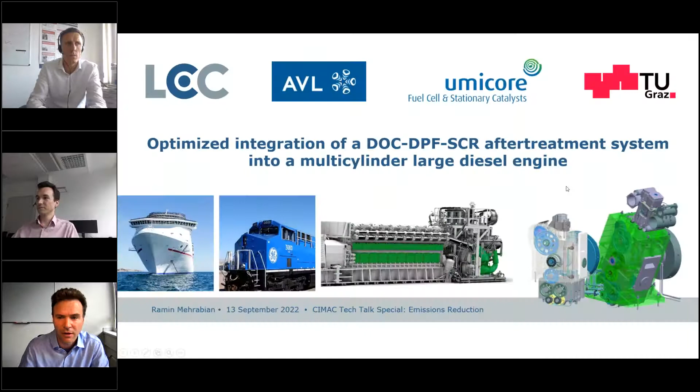Hello, everybody. I hope that you're seeing my presentation. Did I correctly show the slide? Yes, we can see it. Good, thanks.

Hello, everybody, have a nice afternoon. As it was announced, I would like to show some results and also our project together with AVL, Umicore, and TU Graz, which was about the integration of a DOC DPF SCR aftertreatment system into a multi-cylinder large diesel engine.

In my presentation, I will show you some introduction and motivations about this project, the exhaust aftertreatment test system, and also the catalyst specifications which we had, and I will show you some results afterwards, and then at the end the conclusions and summary.

About the motivations in this project: as you know, as a result of continuously stricter emission limits, NOx and particulate emissions of current large diesel engines must be considerably reduced. Therefore, an advanced DOC DPF SCR exhaust aftertreatment system to fulfill ultra-low emissions has been developed and demonstrated in this project.

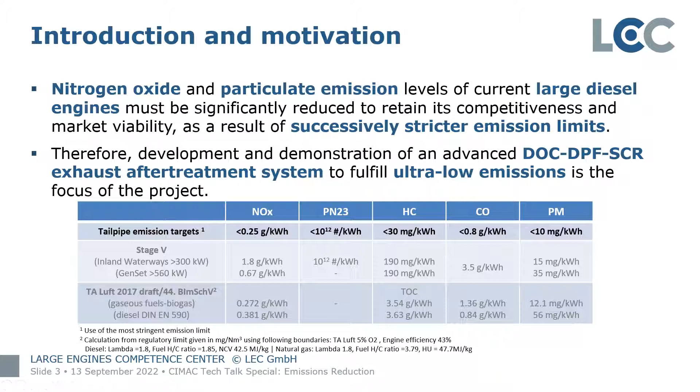Regarding the test cycle used in this project, a non-road steady state test cycle with 8 modes has been chosen for these projects for the evaluation of the exhaust aftertreatment system. It has 4 modes with the rated speed and 3 modes with the intermediate speed of the engine, and of course the idle point, with corresponding weighting factors to calculate the emissions at the tailpipe.

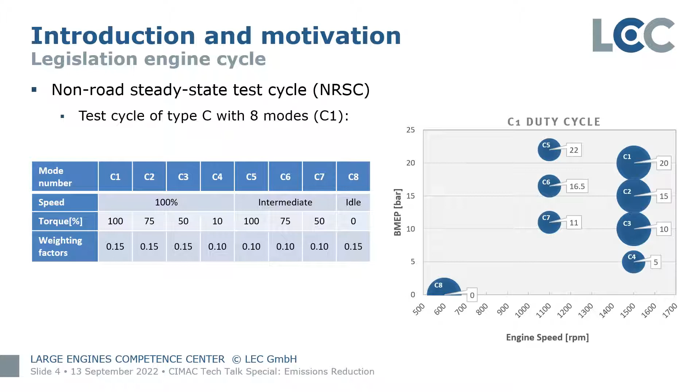This is the arrangement of the test system, and measurement points are schematically shown in this slide. Here, the exhaust gas of one engine cylinder bank is used for the exhaust aftertreatment system because of the size and sizing of the catalyst and also the limitations of space in our test rig. So that means half of the exhaust gas goes through the exhaust aftertreatment system of this engine, and as you can see...

We use, after the turbocharger, a smoke meter and micro soot sensor to measure the particle emissions or soot at the engine out, to more or less monitor these emissions, and then going to the DOC DPF reactor where we measure the temperature as well as pressure and the pressure drop over this unit.

And then the exhaust gas goes to the urea dosing and mixing unit. We also monitor the pressure drop over this part, and then finally going to the SCR reactor, where we measure at different positions the temperature inside the SCR catalyst and also the pressure drop over this unit, and then finally going to the particle counter, doing sampling for the particle counter and smart sampler to measure the particle numbers and particle mass at the tailpipe for evaluation of the performance of the exhaust after treatment system. And of course, at every critical point - inlet of the DOC, outlet of the DOC, outlet of the DPF, upstream DOC and downstream of the SCR - we do sampling to measure the exhaust gas composition with 2 measurement devices: a conventional gas analyzer system and also FTIR, to know the performance of the SCR and also DOC/DPF.

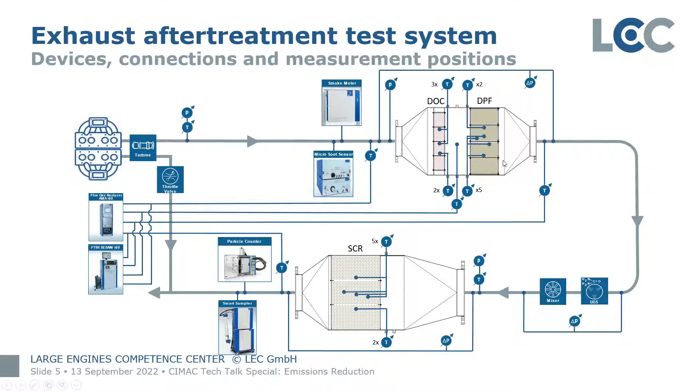And here again a picture about the exhaust after treatment system. The engine, as I said, the exhaust gas of one cylinder bank goes to the DOC DPF reactor.

Here is a picture of our test bed. This is the DOC DPF reactor, and then coming to the dosing and mixing unit. Here is the UDS, and 3 nozzles for dosing the urea, and then this is the mixer, positioned far enough upstream of the SCR, and then going to the SCR reactor and then to the tailpipe. And here, just as an example, here are the measurement sampling positions for the particle counter and also the particle mass measurement smart sampler to measure the particle mass.

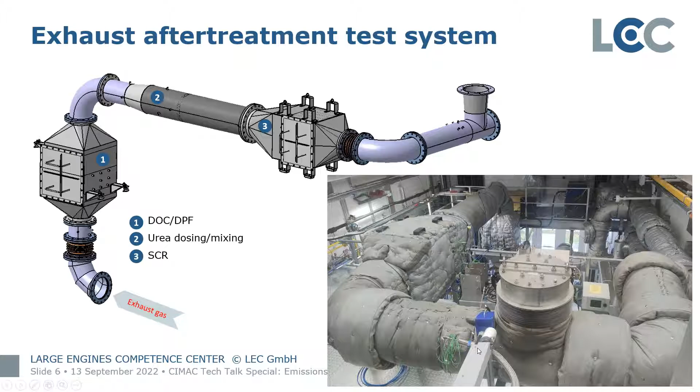Here, briefly, some information about our multi-cylinder engine test rig. The core of this test rig is a 12-cylinder engine with 75-liter total displacement. It can be used to investigate and evaluate different configurations - hybrid propulsion, exhaust after treatment systems - as used in this project, for example. It can also be used to evaluate and analyze different types of fuels, from conventional to hydrogen, methanol, and ammonia.

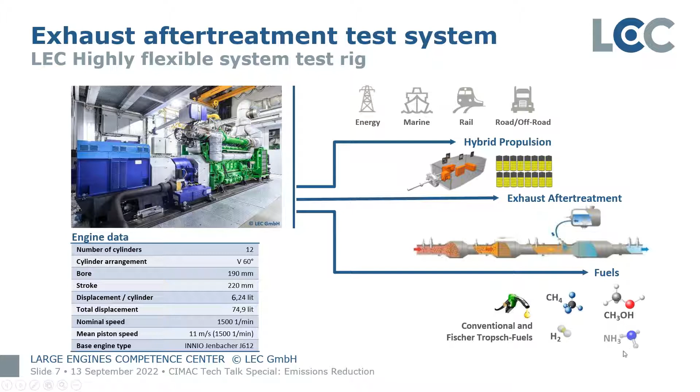In this slide and table, the engine out emissions are shown for each duty cycle point, the discrete mode cycle. Also the total cycle values are shown here for engine out NOx, CO, and HC, as well as PN23. These are measured following the 40 CFR regulation part 1065 to calculate these emission cycle values, the whole cycle value emissions.

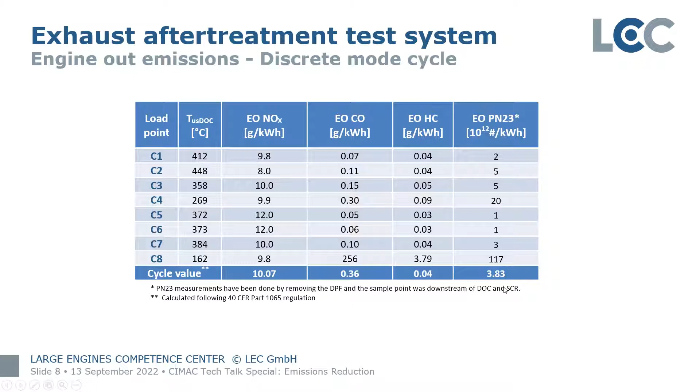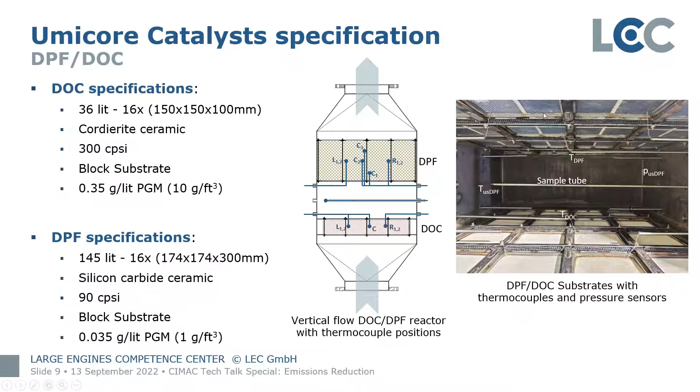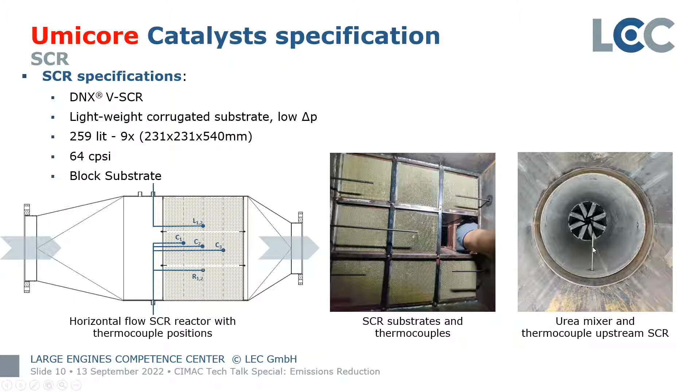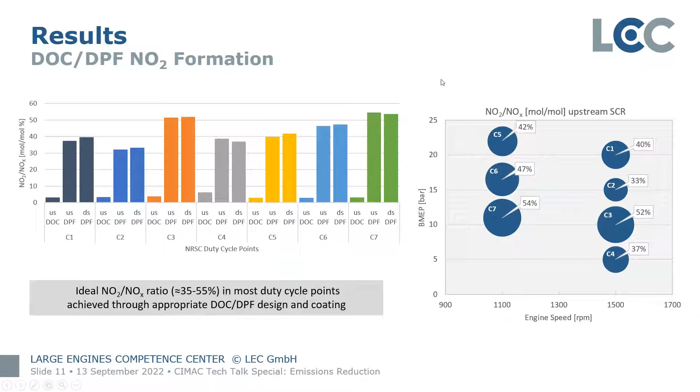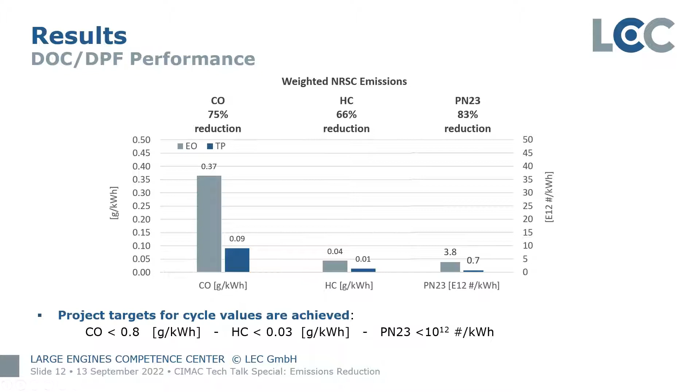The overall performance of DOC DPF was well. We could meet the project targets for CO, HC, and PN23. Here's the PN23 tailpipe emissions, the engine out PN23, and the same for CO, engine out and tailpipe, and engine out tailpipe for HC. If you compare these numbers for the tailpipes with the targets in our project, all of these targets are fulfilled, and these are the reductions of CO, HC, and PN23 due to the good performance of the DOC and DPF.

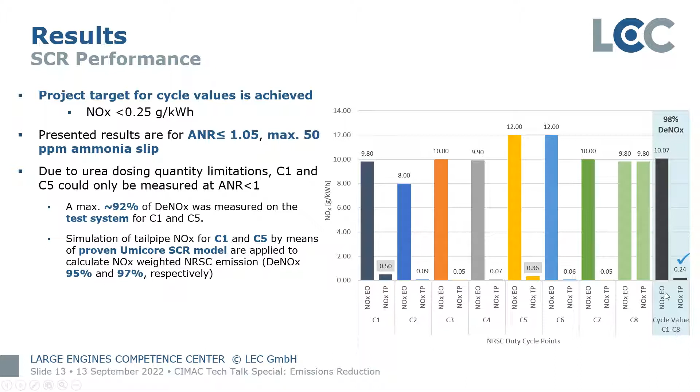Since we wanted to know the performance of these C1 and C5 load points at an ANR higher than 1, which is a meaningful ANR ratio, we used the Umicore SCR model, the simulations of this proven Umicore SCR model, just for these 2 points. Instead of 92% DeNOx, we used the simulated value of 95% and 97% for C1 and C5, and then finally this cycle value for the whole cycle has been calculated.

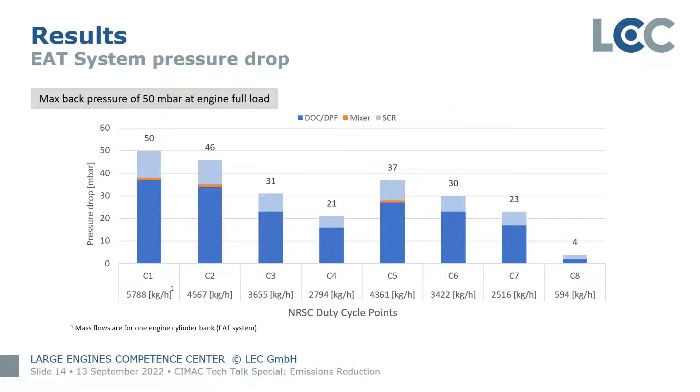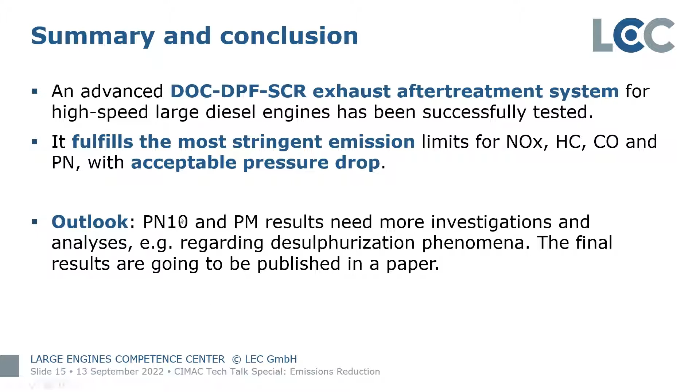Coming to the last slide, to sum it up, an advanced DOC DPF SCR exhaust aftertreatment system for high-speed large diesel engines has been successfully tested in this project. It fulfills the most stringent emissions limits for NOx, HC, CO, and particle numbers with a very acceptable, very good pressure drop. Also, what is still ongoing, we are now further investigating the PN10 and also PM measured parameters because we need further investigations, and this information will be published soon in the form of a paper.

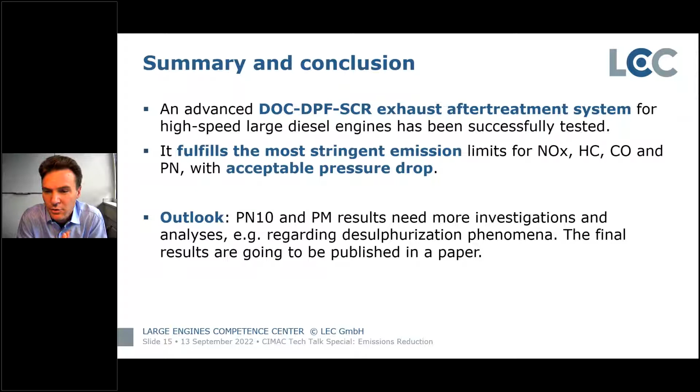The first question was in regard to the substrates. Why do you use a silicon carbide DPF filter and not a cordierite? Could you repeat the question regarding using a silicon carbide DPF filter and not a cordierite? Actually, this was the design to have less pressure drop. As you see, we could achieve this with this system, 50 millibar back pressure.

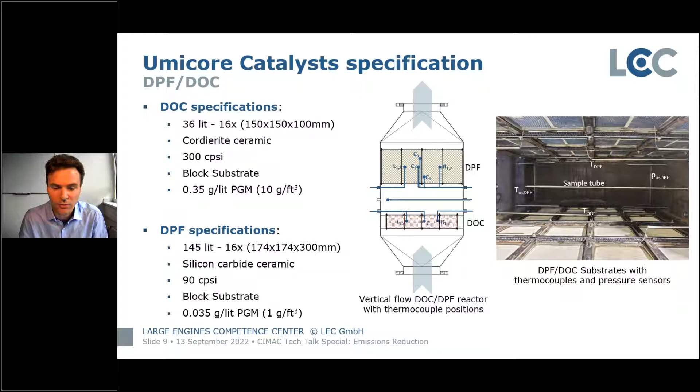Okay, thank you. Then we have other questions regarding the NH3 slip. What was the limit that you set for your NH3 slip? Is 50 ppm of ammonia slip too much, or do you have a certain limit that you set yourself? For the ammonia slip, we set the 50 ppm limit in our measurement and testing system. Of course, not in all of these load points do we reach 50 — we are always something around 20, 25 — but to be on the safe side, we set it at 50 ppm ammonia slip.

Okay, then we have another question. So for a wall flow particle filter, one would typically expect filtration efficiency above 97%. You showed a significantly lower performance. Can you comment on this?

Yeah, we could achieve 83% for PN23. This was actually the performance of this DPF. But I guess this is a compromise between the efficiency and also the pressure drop of this system. I would also like to say it may be referring to the soot cake formations of this DPF, because these measurements were done with very few operation hours, and after longer operation we could have better soot cake formed and better filtration efficiency.

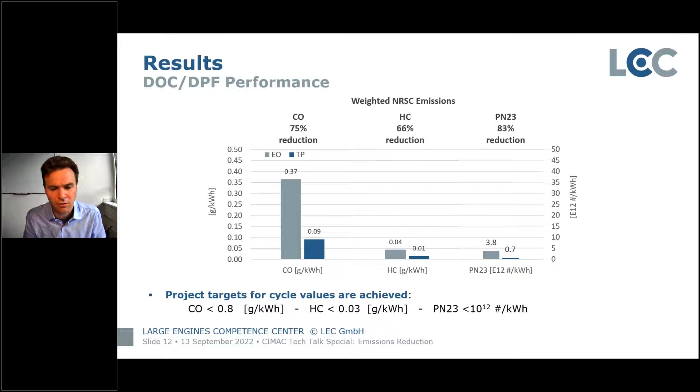No, actually at the beginning of the project we defined, together with UMICORE and also AVL, what the requirements of the engine could be. We should fulfill NOx 10 and PM 15 milligram per kilowatt hour, and this was the minimum requirement for the engine. We did not do any special modifications on the engine.

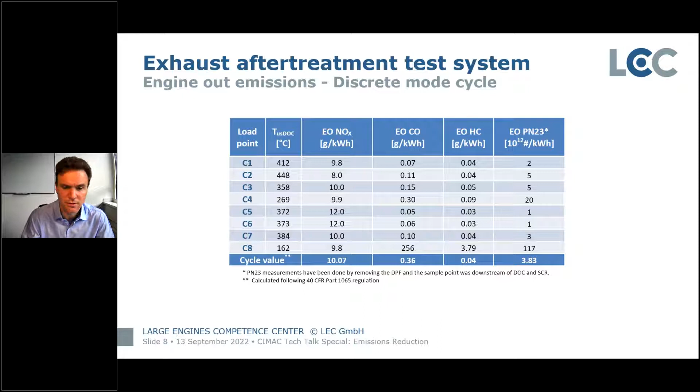He is a research engineer at the Institute of Piston and Combustion Engines, and today he will present something on the topic of investigation on combined scrubbing and particle filtration technologies for maritime application. So, Mr. Etzien, the stage is yours.

Okay, I need to change. Yeah, thank you for the introduction. I just try to share my screen. Okay, now we can see. Perfect. Now you need to see the... where is it? No, you're seeing which one... I think you just switch the two monitors on top. So, Anzeigen, Einstellungen, then you have to switch the primary screen with the second screen. Anzeigen, Einstellungen on top, this one, yes. Now it's the right one, right? Now we see still the PowerPoint. Yeah, so we see the full screen mode. No, we don't see the full screen mode, we see just the PowerPoint. Wow, it's the right screen. You just have to switch to full screen mode. Presentation mode, yes, yeah.

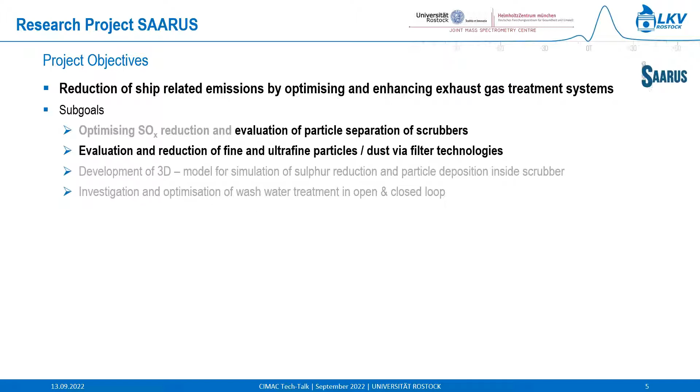If we are looking at the separation or deposition of particles inside the scrubber, there are different factors to consider, for instance the fuel used, as seen in other research work from other institutes. In our project, we used six kinds of fuels: a marine gas oil, and then also an alternative fuel oil.

The alternative fuel was hydrogenated vegetable oil, used just for pre-investigations. For further investigations, we focused on marine gas oil and heavy fuel oils. One of the heavy fuel oils was a compliant heavy fuel oil with a sulfur content equal or less than 0.5 mass%. Then we had a standard heavy fuel oil with a sulfur content of 2.4 mass%.

We also picked two highly aromatic heavy fuel oils, which we called blend A and blend B. Blend A had a low sulfur content, and blend B had a sulfur content of 1.3 mass%.

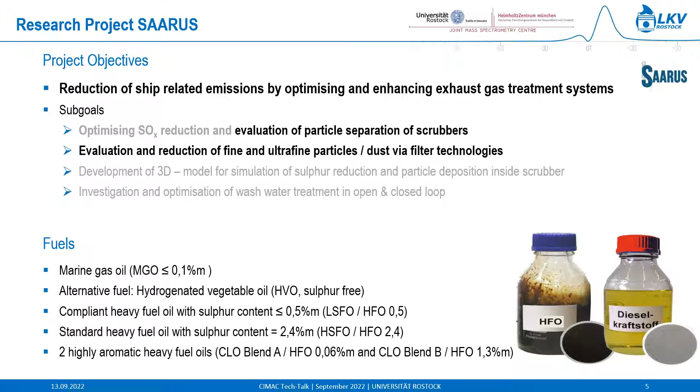Especially for the two blends we were using, which came about due to the fuel change from the sulfur cap of 2020, we can find fuels with high amounts of aromatic components, which can then also be found in the particulate matter emissions. So from the heavy fuel oils, the amount of aromatics is increasing, especially for the blends, where we saw high amounts of aromatic components.

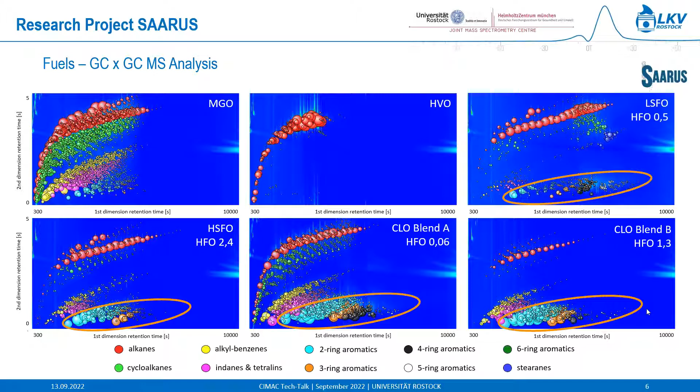Then for the investigations, we used a single cylinder research engine with 18 centimeters of stroke and 15 centimeters of bore.

This single cylinder research and development engine is capable of running on a variety of fuels, from diesel over heavy fuel oils and other blends to alternative fuels. It is equipped with a common rail injection system and has an open engine control unit, and we can adjust the charge air and exhaust gas back pressure at this engine. For our investigation, it was good that we can set up different kinds of exhaust gas treatment systems behind this research engine.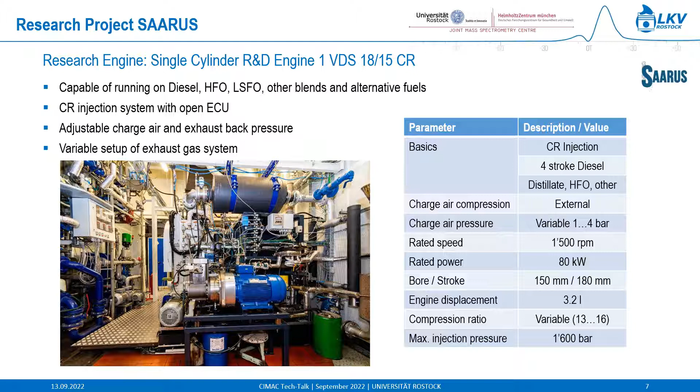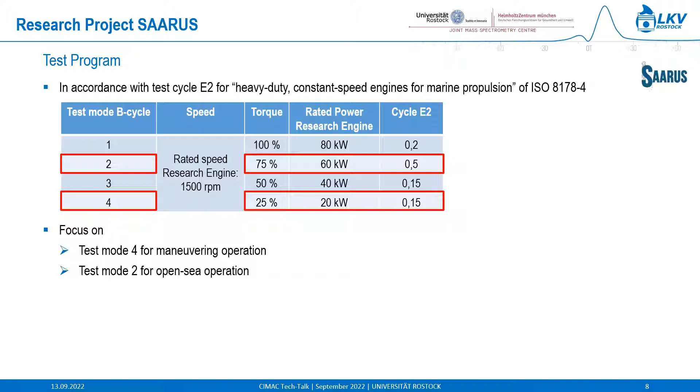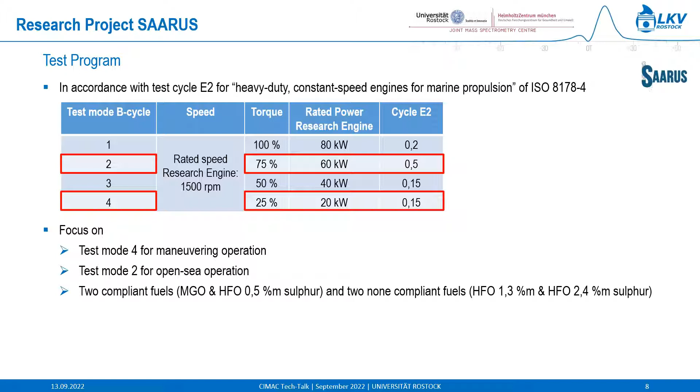From the test program, we were orienting ourselves at the test cycle E2 for heavy-duty constant speed engines for marine propulsion of the ISO 8178/4, and for the main investigations, we were focusing on the two test modes shown here in red. The first is test mode 4 for maneuvering operation at 25% of torque, which for the research engine was a 20 kilowatt engine load point. Then also test mode 2 for open sea operation, which is 75% torque, and here for the research engine it was 60 kilowatt of rated engine power. We also used 4 fuels: 2 compliant fuels, the MGO for the SECA areas, and the heavy fuel oil with 0.5 mass% sulfur for the open sea, and then 2 non-compliant fuel oils. The highly aromatic heavy fuel oil was 1.3% sulfur, and the standard heavy fuel oil was 2.4% sulfur.

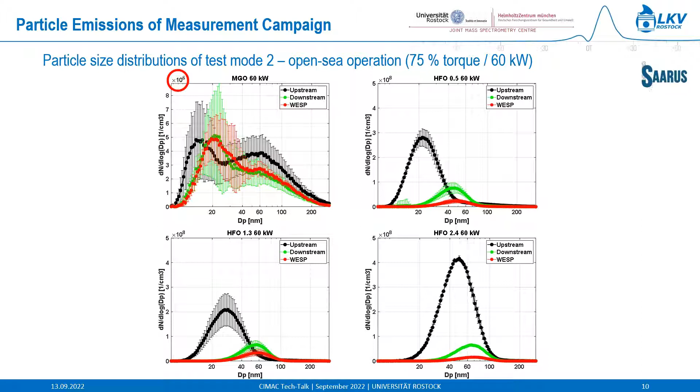Yeah, in the end I will now come to the conclusion. In the diagrams, I hope you've seen that the HFOs show a remarkable higher particle mass and particle numbers compared to the MGO. Then when you look at the black and green curve, the scrubber led to changes in the particle composition. Also, we have seen that sulfur from the gas phase was partially transferring to particulate sulfate, where we've seen some increases in particle mass.

I haven't shown this in particular, but that's additional side information for you. What you've seen in the 4 diagrams on the 2 engine load points is that the scrubber affected the number size distribution of the particle emissions through coagulation of particles. And what we've seen also is that the inhalable particle matter fractions, which are identified as severe public health risks, are not removed. We still have large amounts of inhalable particle matter fractions downstream the scrubber.

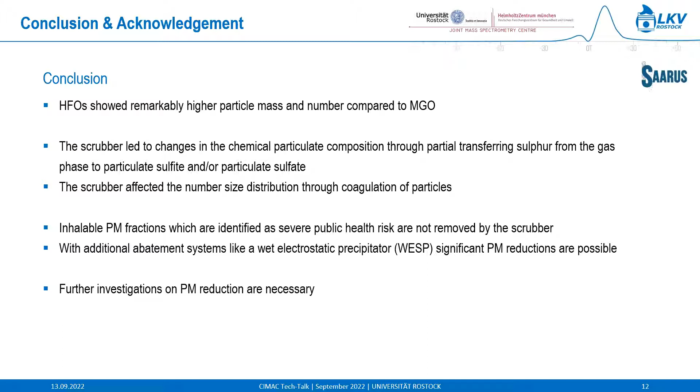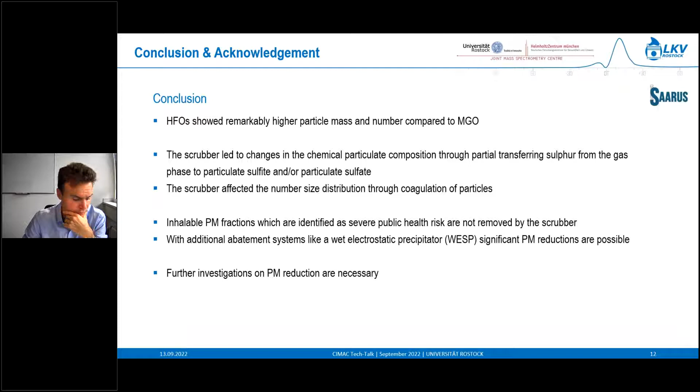And with additional abatement systems like the wet electrostatic precipitator, we can reduce the particle matter emissions significantly. But for the future, there are still further investigations necessary, since the system, the WESP, couldn't be operated at the highest voltage due to the duration of the testing. So for further investigations, the systems have to be optimized to increase the voltage to decrease the particle matter even more.

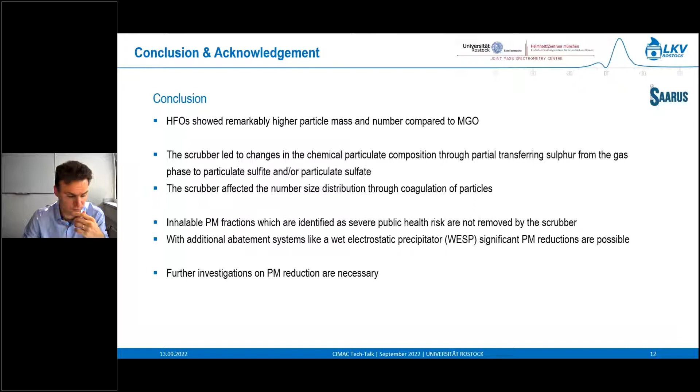Okay, maybe I can. First of all, thanks a lot, Mr. Etzien, for this very interesting presentation. Just a reminder to push your questions into the tool. Maybe I'll start with one from my side: can you say something regarding the dimensioning of this system compared to the cylinder displacement? How much are the individual components compared to the cylinder displacement? I know you're running a single cylinder engine, but just to give a ratio to understand the proportion compared to, for example, a DPF system.

The scrubber was downscaled from the involved company SAACKE, and it's a pretty large tower compared to the engine. It has an inner diameter of 30 centimeters, and it's a U-type scrubber with an entire height of 2 to 3 meters. The filter components, compared to the wet electrostatic precipitator, were 1 meter with the entire cabinet - the electrical cabinet was 1 meter by 1 meter by 2 meters height. So compared to the engine itself, the exhaust gas treatment components, the scrubber, were roughly twice the size, and the WESP was about the same size as the engine itself.

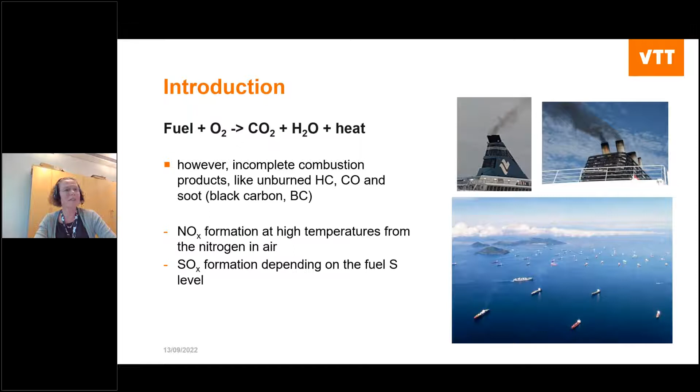So these are the particle emissions. Then, depending for example on the temperature scales, some nitrogen oxide formation happens, as well as, depending on fuel sulfur level, sulfur oxide formation. And obviously the soot, or the black carbon, is visible to us in certain instances, as can be seen from these figures also.

It was already pointed out in the previous presentations that there is a need for actions to reduce particle emissions from ships. This figure from a publication by Hilkka Timonen et al. represents quite nicely the effects that soot, the black carbon, has on both human health and on the climate.

The health effects come mainly from the particle size, since these are small particles that can penetrate deeply into human lungs and cause diseases like asthma and premature deaths. In addition to these effects, soot also affects the climate. There are different kinds of effects - when these particles are in the atmosphere, they can affect direct absorption, take part in cloud formation, and since these particles stay in the atmosphere for days or even weeks, they can also be transported over long distances.

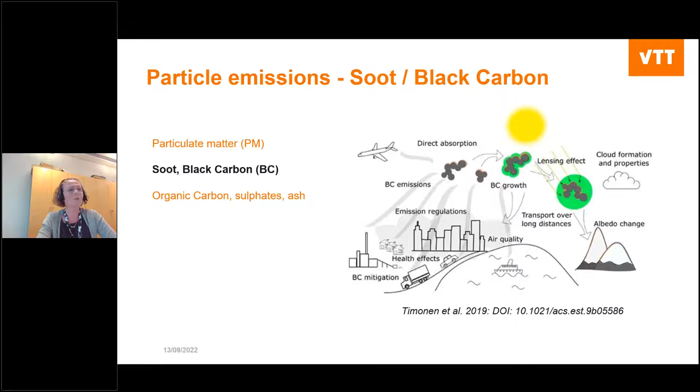One critical issue here is the Arctic areas, where you have white snow, and if you have in addition a layer of black carbon on the snow, you can easily understand the effects it will have on the snow and ice melting processes. So these are important effects it has.

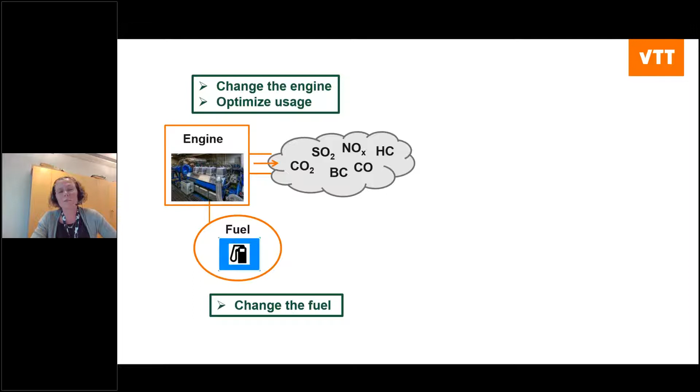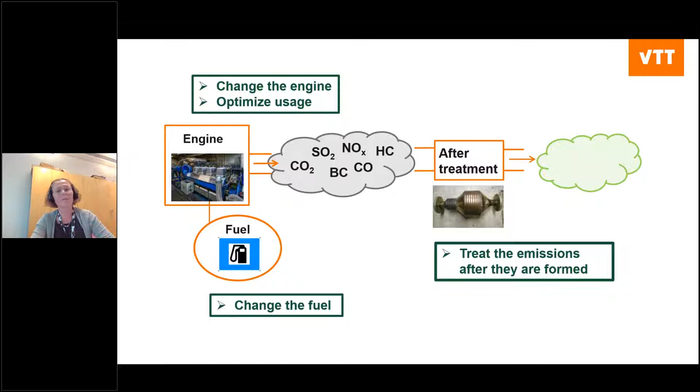Since I like to simplify things, if we want to do something - and we already heard in the previous presentations - we basically only have the engine and the fuel. If we want to change the exhaust gas composition, we need to do something for the engine or something for the fuel. This is as simple as it is, put in a simple way. If this is not possible or enough, then we can introduce an after-treatment device to treat the emissions after they are formed to get those low emission levels.

Today we all know we already have global regulations for nitrogen oxide and sulfur oxide, and this is also where we start, which forms the basis for the conditions when we start to think of reducing particle emissions. It is especially this fuel sulfur level limitation that has a huge impact here. So when one is thinking of particle emission reduction technology, it can only be selected once the choice to fulfill the sulfur legislation is adopted.

Today I will shortly present three different pathways. We actually already had presentations for two of those, and now I will show some more. The first one is when we have chosen distillate fuel to fulfill the sulfur legislation, and we add a diesel particulate filter. The second one is when we choose gas, natural gas, for fuel that is nearly sulfur-free, and relying on the fact that gas combustion is known to produce lower particle emissions, we study that without any after-treatment.

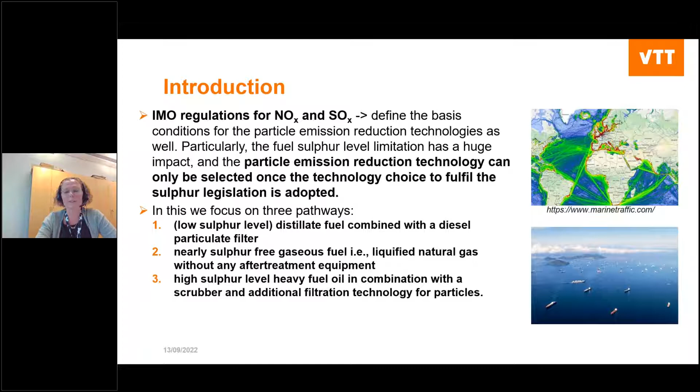With all these three studies, we have conducted particle measurements, also many other gaseous measurements, but I will only concentrate on these particle measurements today - the particle mass measurement according to the ISO 8178 standard method, then the particulate number, also according to this standard that considers non-volatile particles with diameter greater than 23 nanometers in size. In addition to this, we have also measured the black carbon.

Now to these three concepts and results. The first one was the distillate fuel combined with the diesel particulate filter. All of these projects we have run in different engine laboratories. This one was at ABC with a 2 megawatt medium speed engine, and here we had an active regeneration DPF.

We have had these DPFs on the roadside for a long time, and in general those have passive regeneration, meaning there is a catalyst which helps the regeneration. But here we have an active regeneration without any catalyst, and in combination with this, we have an SCR for the NOx, nitrogen oxide, reduction.

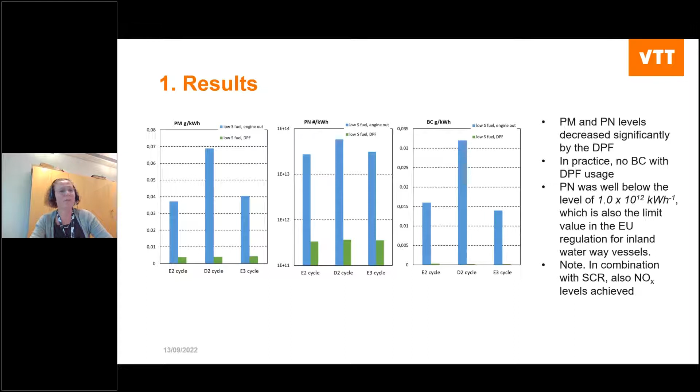When we look at the BC result, we see, or rather do not see, any black carbon here. So the levels were very, very low in practice - we got no black carbon out from the DPF. These results, according to the PM and PN limits regulated in the EU regulation for inland waterway vessels, are fulfilling those regulations. And just to note, I won't show the results, but in combination with the SCR, the NOx levels were also achieved with this concept.

Then to the second project or study. This was done with natural gas as a fuel in VTT's laboratory marine engine, a 4-stroke medium speed diesel engine run in dual fuel mode. We had natural gas as the main fuel, and then this very low sulfur level marine gas oil as the pilot fuel. In comparison, we also did studies with marine diesel oil, which fulfilled the sulfur limitation of 0.1 in this study.

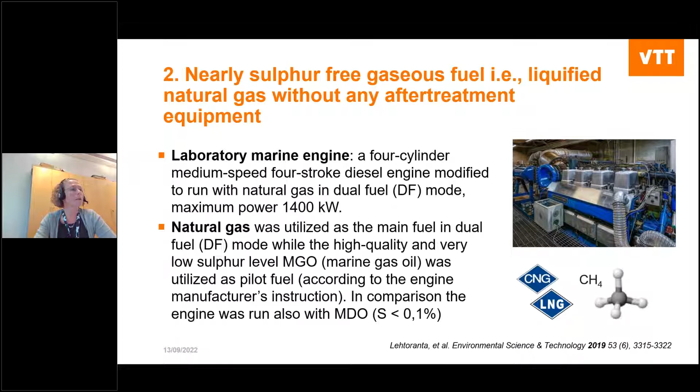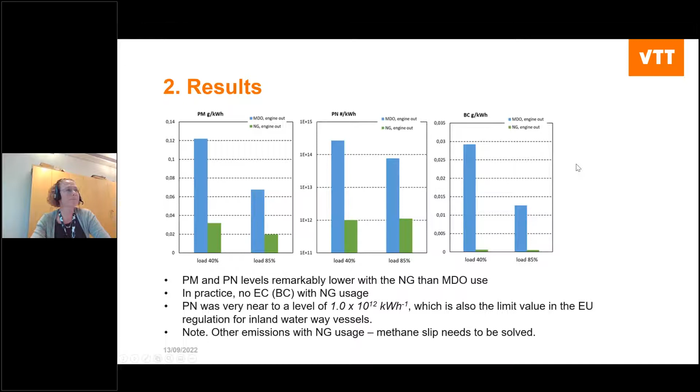Then the third case: high sulfur level heavy fuel oil in combination with a scrubber, and then having an additional filtration technology for particles. Our test fuel here had a sulfur level of 2.75%, and the test setup was built up in connection with a medium speed diesel engine.

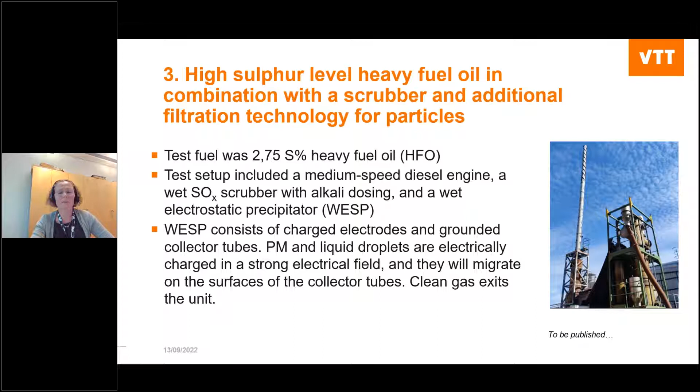We had a wet scrubber with alkali dosing, and then a wet electrostatic precipitator. The electrostatic precipitator consists of charged electrodes and collector tubes - the particles are electrically charged, and then they are collected on the surfaces of those collector tubes. I won't go into details of this, as this is something to be published later on.

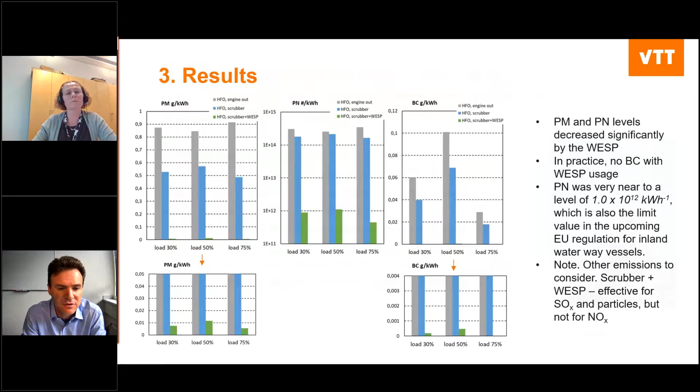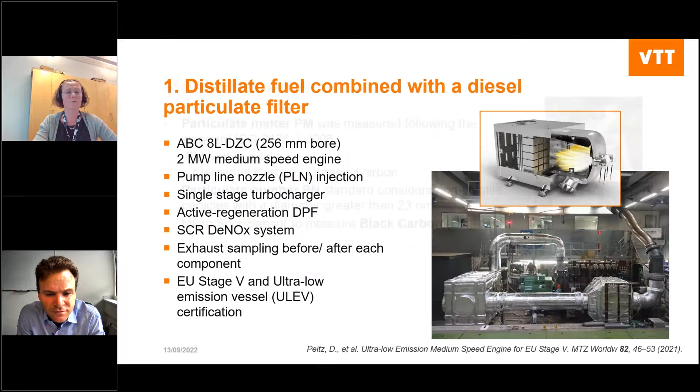Okay, then I have a question from the audience regarding the measurement methods used in the study. They say that IMO's black carbon measurement methods are discussed, so can you mention which methods were used in this study for the black carbon measurement? Yeah, for the black carbon measurement we had the microsoot sensor. As far as I know, this fulfills the IMO's black carbon definition.

Other questions from the audience? Otherwise I will do my last question. Do you see the possibility that particulate matter will be introduced in the upcoming IMO legislation? What is your opinion in this respect? Like it is now in Stage 5 for highway, do you think the upcoming IMO legislation will also introduce this, or will it just be an additional requirement for specific vessel type approval? Since the black carbon issue has been in discussion for so long, I would expect to have some limit, especially for black carbon.

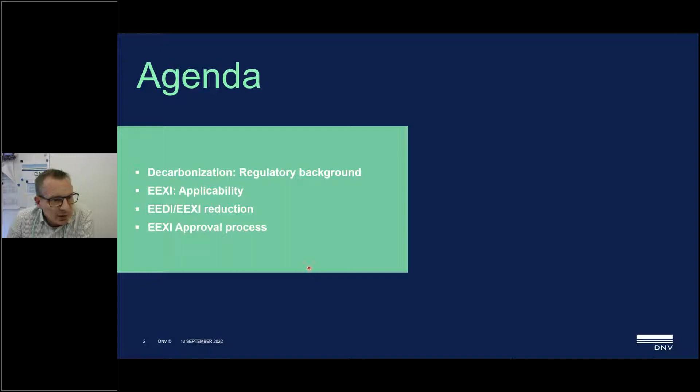Thank you, Stefano, for the kind introduction. I hope you can all see my presentation now. Okay, thank you. In my session, which will close this tech talk for today, I will talk about decarbonization and reduction of greenhouse gases. First, I would like to give a short introduction into the regulatory background at IMO, and then for the rest of my presentation we'll focus on the so-called EEXI, the Energy Efficiency Existing Ship Index.

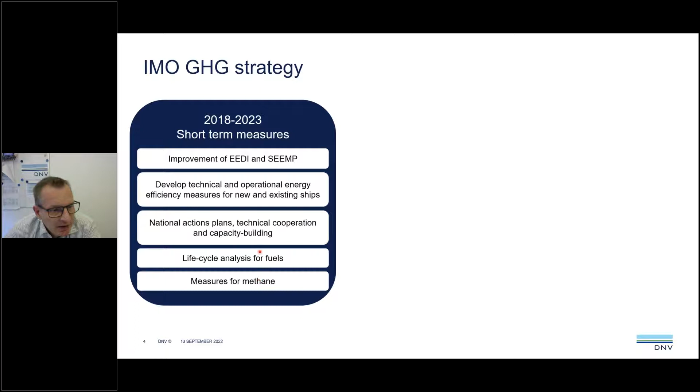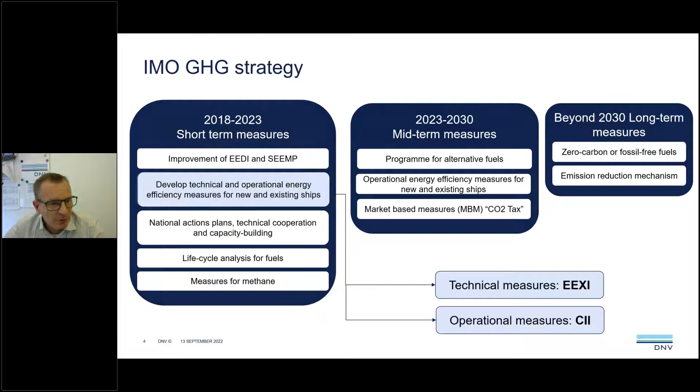Only shortly, at the end of this long day, into regulations. I would like to start with some regulatory background, though I won't go too much into detail, but I believe it's worth showing that these short-term measures by IMO, the EEXI and CII, are only the beginning of a longer story on greenhouse gas reduction imposed by IMO, which most of us will be faced with for the next couple of years, maybe even up to our retirement. The short-term measures are illustrated here, one of which is development of technical and operational energy efficiency measures for new and existing ships, and also life cycle analysis of fuels. On top of that there are mid-term and long-term measures. In my presentation I will focus on the development of technical and operational energy efficiency measures for new and existing ships, which are now regulated as the EEXI, a technical measure, and CII, an operational measure. First, let's look into the EEXI, the Energy Efficiency Existing Ship Index.

That is nothing else than an extension of the well-known EEDI, the Energy Efficiency Design Index of ship. In short, it is nothing else than a specific CO2 emissions of a ship. So it is the engine power multiplied by fuel consumption, specific fuel consumption, and then defined CO2 factor for the respective fuel. Then innovative technologies which reduce CO2 emissions can be deducted. And that is then basically divided by reference speed capacity, which is in most cases the dead weight,

and several correction factors depending on ship types and so on. Now, the important thing is that the EEDI and also the EEXI, which is now also applied for fleet in service ships, is only calculated once in a lifetime. So there is only a one-off thing to do if no bigger major conversions are done to the ship or the energy efficiency of the ship is significantly improved.

And like NOx emissions, the EEXI is based on standard reference conditions. So it's kind of like you can compare it somehow to the automotive industry, where also the fuel consumption, you might know about the NEFZ test, is measured under reference conditions. So similar here now applies also for the EEXI.

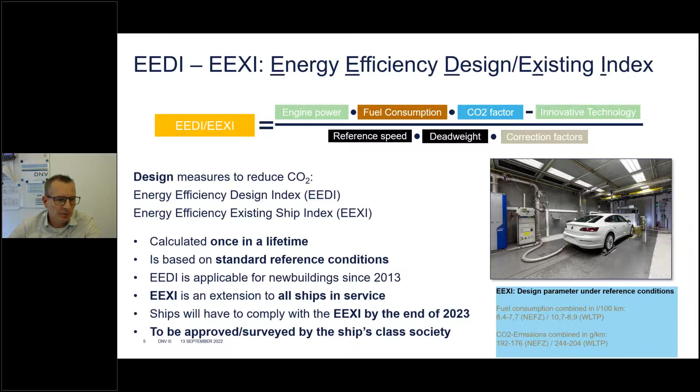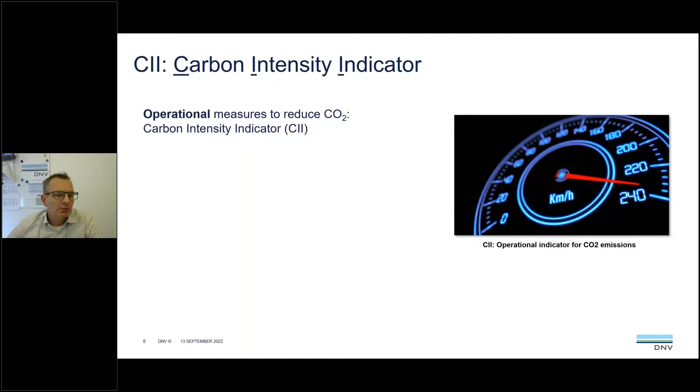Only one slide maybe on CII, only to illustrate the differences here. The CII is an operational measure. So, if you again compare it to the automotive industry, that is not the NEFZ fuel consumption, that is actually the in-use fuel consumption, how you operate your vessel or your car, okay? And that is purely based on reporting of fuel oil consumption data, which is done on an annual basis anyway.

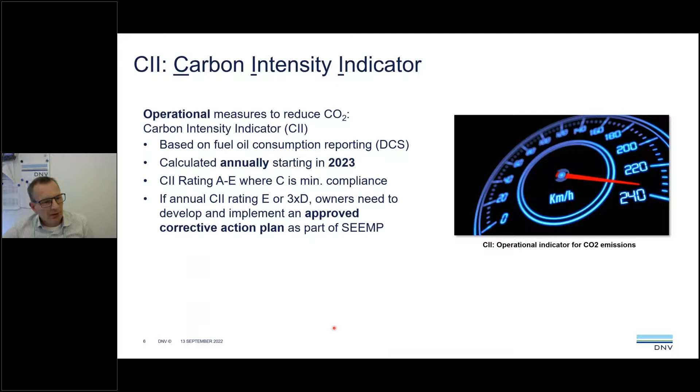And then based on this fuel oil consumption data being reported by the owners and the distance traveled, the CII is calculated on an annual basis, and there will be a rating. And depending on the ratings, ships have to react and implement mitigating actions in case they do not comply with the required ratings over the years.

So back to the EEXI. So again, this is a design measure only to be calculated once in a lifetime and certified under reference conditions. If you take a closer look into the formula again, then you can see here what the biggest influencing factors are. So that is on one side here, of course, machinery, engine power, fuel consumption.

Fuel consumption, I believe, the potential to further reduce fuel consumption is marginal. However, here the CO2 factor, so that is the fuel actually used under design conditions, again, has a big impact on the EEXI value. And then on the other side, also, of course, the reference speed. So that is more or less the hydrodynamics.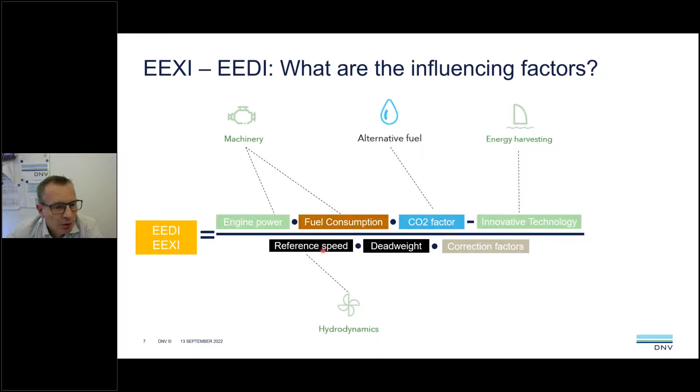We also see that for certain ship types, the EEXI is not applicable. It is worth to note, however, that the CII rating has different applicabilities. So if your ship does not require to report an EEXI, it does not automatically mean that it does not have to report a CII rating. So please take a closer look at here the applicability charts.

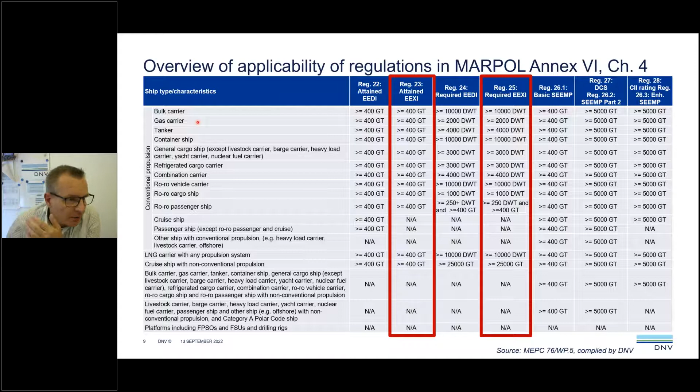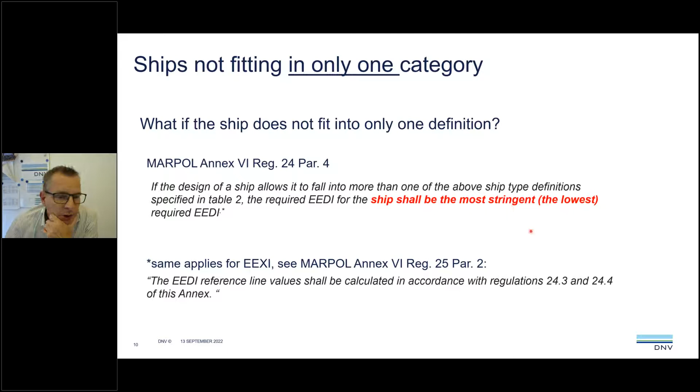One question we are commonly faced with is actually if a ship does not fit into one category. So if, for instance, a ship can, according to the definition, be categorized as bulk carrier or general cargo ship, then also the regulation is clear. Ship must be under this EEXI regulation, must be categorized under the most stringent, meaning the lowest required EEDI and the lowest EEXI.

A few minutes ago, I mentioned that the EEXI is an extension of the EEDI for the fleet in service ships. So now you might ask yourself, does it also apply to new buildings? Here's a clear answer: yes. Ships will have to comply with the required EEXI values on the first periodical survey in 2023, but also on the first initial survey, which is the delivery.

Now you might ask yourself, okay, but vessels also have to comply with the EEDI. Why am I mentioning this? Well, the reduction requirements for EEDI and EEXI are not aligned. The EEXI is actually more stringent than the EEDI.

So depending on the contract date and delivery date, a vessel like this bulk carrier might fall under the EEDI requirements for phase 1 only. However, if the vessel is delivered, say in March next year, it will have to comply at the time of delivery with the required EEXI also, which is more stringent than the required EEDI. So please keep in mind that EEXI is more stringent in most cases than the EEDI, and will also have to be complied with by ships under construction now.

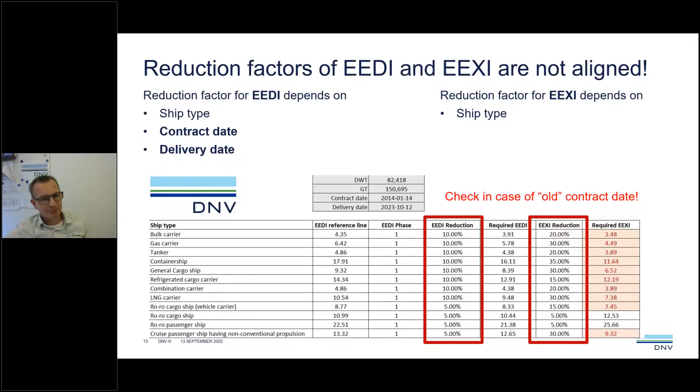Okay, what are the countermeasures? How can the EEXI values, mostly for the fleet in service ships, be improved?

I tried to illustrate already with the formula, shown shortly by these blocks. But this only gives you some ideas about the potentials.

The biggest potential, and what we see most applied so far, is engine power limitation. For instance, just as an idea: if the engine power limitation is reduced by up to 50%, that will result in an EEXI improvement in the order of 37%.

A big improvement also comes from a fuel switch to alternative or fossil-free fuels. Fossil-free fuel, like ammonia, will even have an EEXI of 0.

However, ammonia engines are not yet available, so some ship owners already constructed ships with LNG as fuel. Here you also see that not only a specific fuel consumption improvement is achieved, but also due to the difference in the fuel conversion factor to CO2, an EEXI improvement in the order of 25% can be achieved.

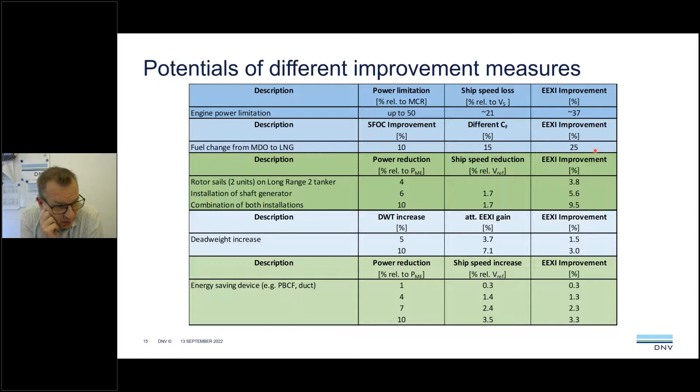However, conversion of a diesel ship to a dual fuel ship is quite costly and might take more time. So we have seen a couple of conversions, but what we see most for the time being, in order to comply with the EEXI, is actually engine power limitation.

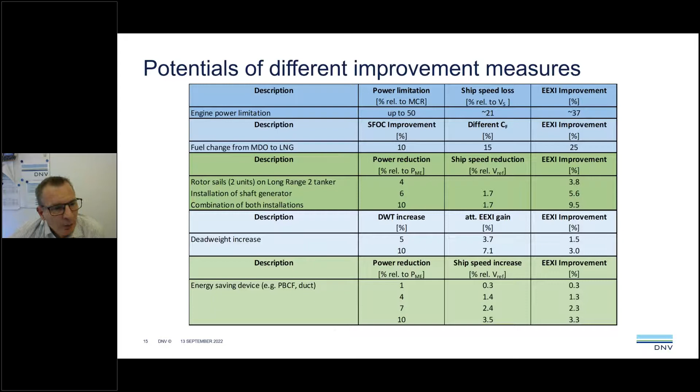All the other measures you see here, like rotor sails or energy saving devices such as ducts or other measures, are marginal. IMO, however, also allows for other innovative technologies, though they are still at an early stage. Some ships already apply those, like photovoltaic cells or wind assistance by Flettner rotors, but those are only marginal in actual construction now.

But I believe we have to see more of those in the future in order to comply not only with the EEXI requirements, but all these measures will also have a direct effect on the CII, of course.

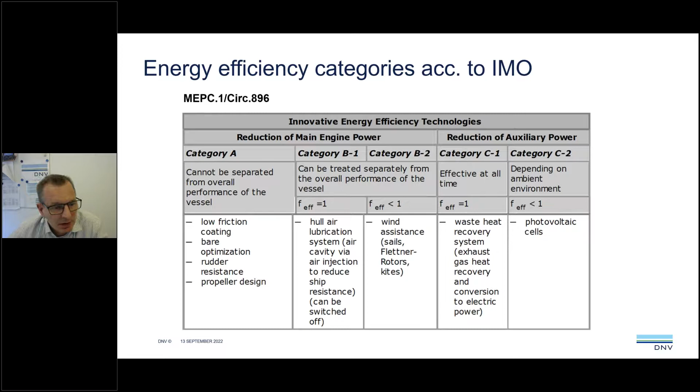Coming to the most effective, or most prominent, measure now applied for EEXI compliance: the so-called engine power limitation or shaft power limitation. Engine power limitation is a limitation of the power of the engine itself, whereas shaft power limitation is based on measuring the torque.

The torque is measured on the propeller shaft, and then in a closed loop the engine power is limited based on that torque measurement.

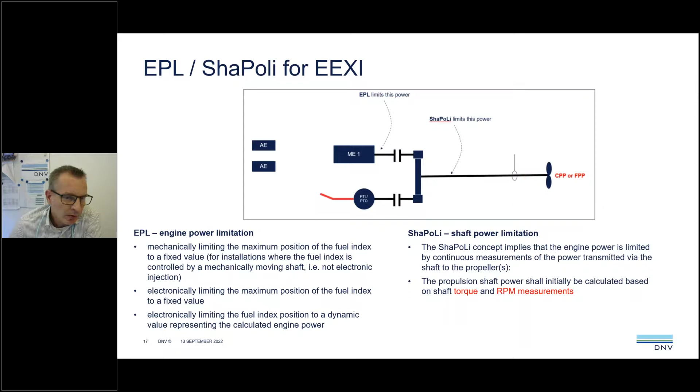You can identify different functions now for these EPL and ShaPoLi systems, and DNV now also offers a type approval for these systems. You might have seen at SMM last week we presented 2 type approvals which fulfill part of these functions, or maybe even all of them.

There's power limitation, and an override must be available due to requirements of emergency cases. An indication should be given, an alarm, and the recording of override events should also be available, and the system should be tamper-free, so the crew should not be able to tamper with it without recording of any failure modes.

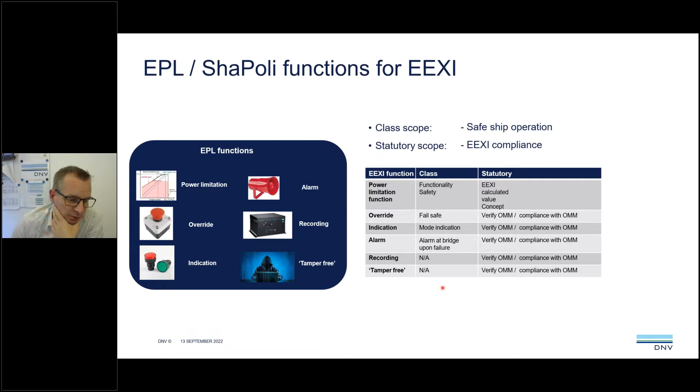One thing to mention: IACS in the meantime also published a recommended practice for the shaft power limitation system. There's a slight deviation between the requirements of MEPC and IACS, because in the IACS interpretation no feedback of the shaft power limitation back to the engine is actually required. Here I only recommend that consensus with the flag administration might be required in case you think of applying such systems.

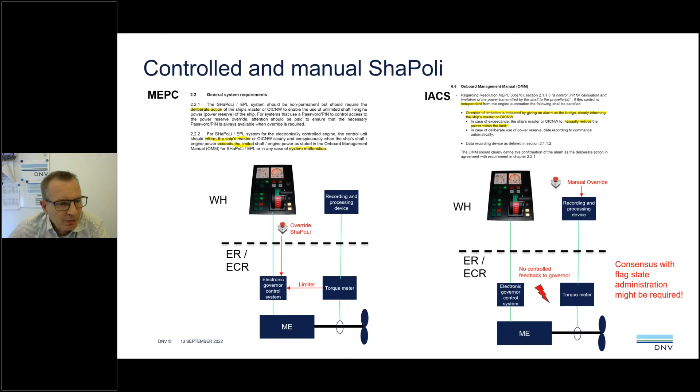Only a short approval process - ship owners are aware of that. DNV is offering not only a tool for the calculation of EEXI, but also for the submission of onboard management manuals and the submission of the whole process.

Please keep in mind, all ship owners and operators listening here, if you do some alterations to the engine or engine control system, that is not really related to EEXI - that is related to class rules, safety, and SOLAS. If you alter an approved engine beyond its approved limits, then other approvals beyond EEXI are applicable and required. So if you are fiddling around with the engine control system, this needs to be submitted also to class for reapproval.

So please keep in mind that EEXI is not only a statutory requirement. In cases you are doing mitigating actions - be it propeller retrofitting, bulbous bow, or even engine improvements - keep in mind that those also have to be approved according to SOLAS, IACS, and class rules.

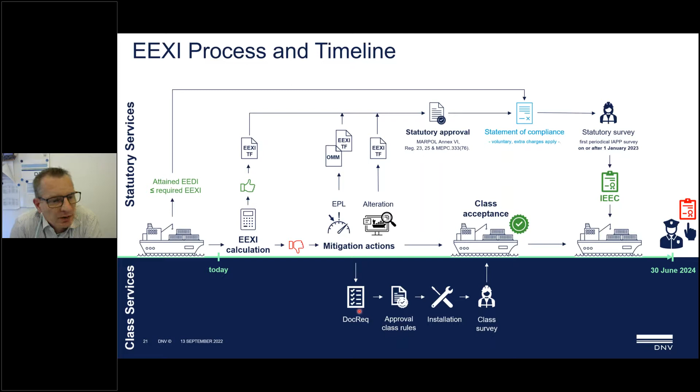This already sums up my short overview - DNV is also offering more information, webinars, technical newsletters, and so on regarding this decarbonization pathway. And I'm now happy to receive some questions from you.

Stefano: Hello Fabian, thanks a lot for this very good presentation. I recommend you pose your questions, but maybe I can start from my side. There is a lot of pressure coming for this defossilization, with different kinds of fuels with different carbon content and origin of carbon. So how will this affect the regulation? Do you think the regulation will take care of this, and how will it be deployed in the life of the ship? If somebody uses green methanol or non-green methanol, how will this be regulated, for example?

Of course. In my presentation I try to focus only on EEXI, which I illustrate as a design measure. For instance, if you operate your vessel on biofuels, that will have no effect on the design of the ship. Ergo, it will have no effect on the EEXI.

The effect, however, on operational measures like MRV, DCS, or CII is still to be defined by IMO, but most probably will have an effect, because that is part of the life cycle analysis of fuels. But you could say that if you do not have to change the design of the ship, then it will have no effect on the EEXI.